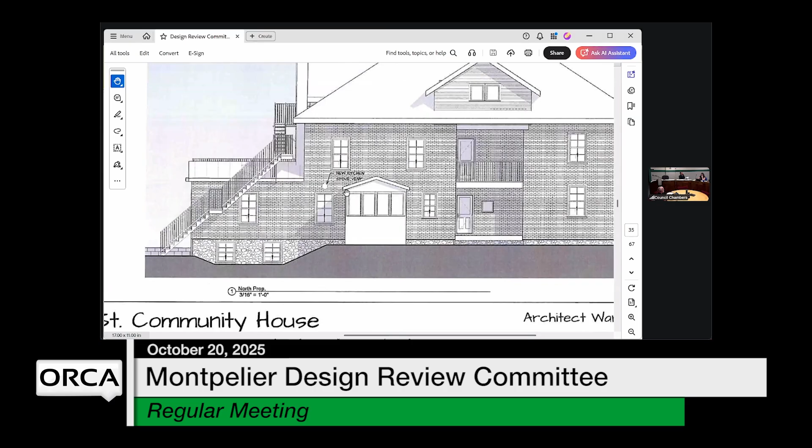So the vents that we've chosen are ones that are intended to be extremely durable to the weather and also...

Oh, was that not on? Thank you, yep. Rebecca, could you hear? And Ben? No, okay. No problem. Next time, feel free to let us know, Rebecca, if you can't hear. I didn't know how to interrupt. Sorry. It's okay, you can always send me a message.

Okay, hi everybody, can you hear me now? Great. So my name's Tom Stearns. I'm working on converting the 100 East State Street property, which is now commercial offices, back to its original use, which was as a residential building.

Today what we're talking about mostly is these exterior things, but briefly, the project seeks to attract single professionals or young couples interested in a more shared living situation, cooking meals together and sharing some facilities. People have their own bathrooms and bedrooms, but the property is well suited for this. It's like dormitories many of us have been in. This congregate living model is proving successful financially, and also because there's a loneliness epidemic out there, so bringing people together who are interested in that is really important. This is an exciting project I'm involved with.

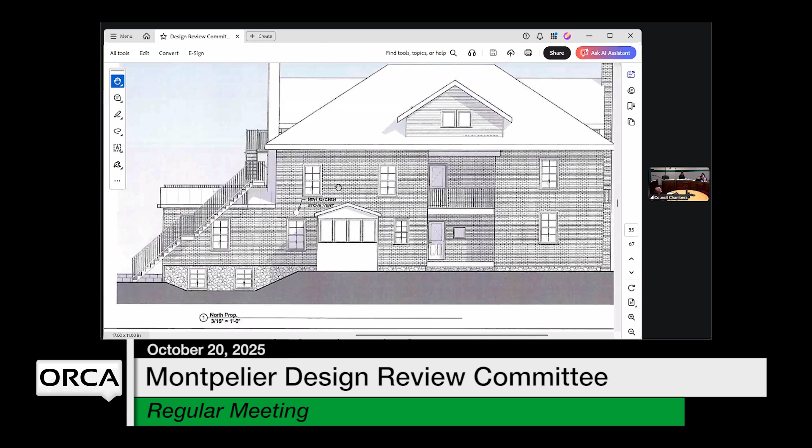What we're seeking to do is have these be as nearly invisible as possible. The desire is for them to be very high quality for the weather, but also something we can paint to help it disappear. You've all seen things painted in an attempt to hide them, and if it's a little off it really stands out even more. We're not trying to do that, but trying to have it blend in. So that's as far as the building goes.

The other changes to the property before this committee have to do with some trees getting removed and some of the parking and pavement getting removed. There are a lot of parking spots there, maybe 2 spots for every resident who will be living there, so that's totally unnecessary. We want to create more permeable surface for rainwater protection, and also more room for gardens.

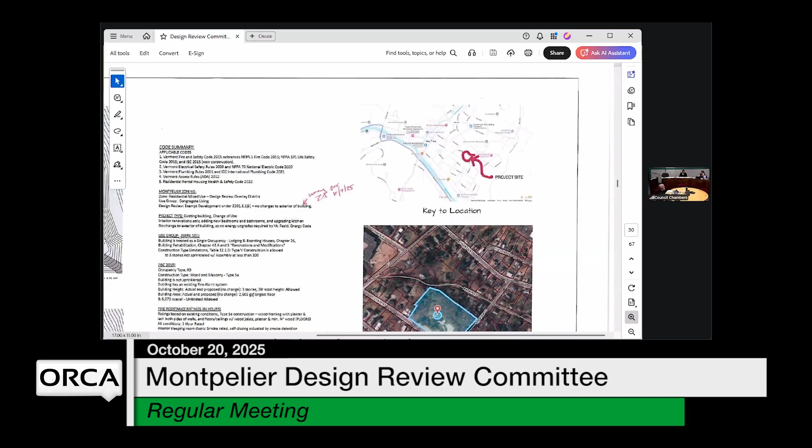Meredith, I don't know if you have the actual... Yep, I can go back. It's on the, give me a second. I don't want to make people busy. As I scroll madly... thank you, I'll go back to this one. Okay. So this is the actual right now.

You can see there's a loop road and a big parking lot there. We're proposing to reduce that by, I think, 56%. So you'll just see the main road coming in up to the building. It will be widened a little bit, which was requested by the fire department and fire chief, and you see the fire truck mocked up in there, which creates a turnaround zone. So there's a little new pavement to clarify these two parking areas, but then that leaves the entire open space full sun, beautiful flat space for gardens, lawn, some fruit trees, things like that.

So the removal of the pavement, we've got the vents, the removal of the pavement, and then a few trees that are getting removed.

And the handicapped access ramp on the front, yeah let's look at that while we're in this drawing. The handicap access ramp is right there next to the front entrance with a little paved zone there to roll in. Currently there's a movable handicap access ramp in the garage up there. It's a little rickety, and it takes two or more people to move it. Anytime you need to move it, that's not really accessible, that's a pain in the butt. So we're proposing to have that right off the front.

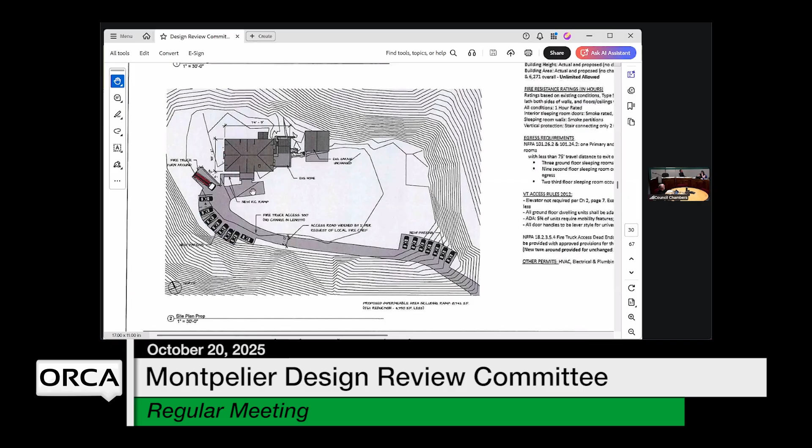Will the ramp be metal? Let me give it a second and stop the share to see if I can find where I think we had the railing details. I don't know if we do. Is the floor surface of the ramp a smooth metal or an open grating? If it's open and grated, that helps with snow and not having to be shoveling it all the time, although depending on the grates and freezing, thawing, nasty snow we sometimes get, it still needs to be managed. So I haven't chosen the specific one yet for the track. They make one that has a narrow opening between the slats.

You can get it in galvanized, which you never have to do anything with. And they make one that has a wider opening, but they make one a little narrower in case somebody's wearing heels, so they don't go through. Or various canes, things like that. I highly recommend those. I put one in for my mom a number of years ago, and it was solid, which meant we had to shovel it all the time, but it also meant there was no risk of anything getting stuck in it.

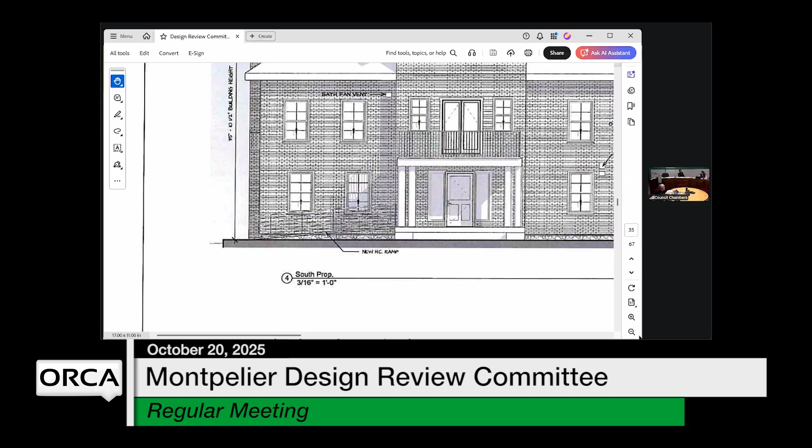And the final piece is some trees and tree removal. Meredith, would you be able to bring that landscape design up? There's 5 trees we're talking about - 5 main trees. A half dead one, an all dead one, a couple of fallen ones, and the main ones that are going to visually change things are these 3 spruces that Meredith is circling right now.

Two of them are pretty big, one of them is medium size. They block some of the view up into the property or out from the property. But the other thing they do is block about 50 to 70% of the winter sun from hitting the building. And that's rough.

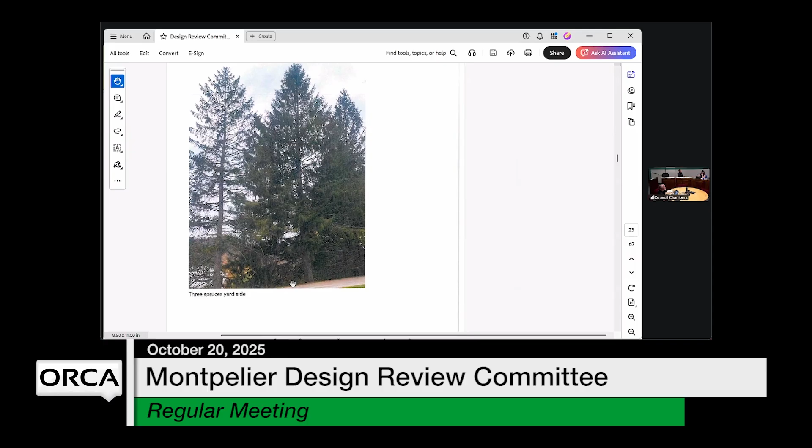And so the plan - I'm just going up to that view of the trees you sent a photo of. So those are the 3 spruces from the roadside, and those are the view of them from the yard side. So what we're proposing is to remove those trees, let the sunlight all the way in, expand the views from the property to the local hills, and plant a hedge there that would eventually get to maybe 8 or 10 feet high along that whole edge.

That would create the same privacy screen that's currently there from these 50-foot tall trees without blocking any sun. For those who know the property, this is a very steep slope down to East State Street. So all the houses along there, it's only when you're on the second floor that you can even see onto this property. That's why just a small 10-foot hedge would completely block that view.

Hold on, I had pulled that up on a Google view. And to be clear, one of the things I love about this property is it's 3.6 acres. It has beautiful forest, and so we plan to tend and care for it well. But trees blocking half of your sun all winter - we already have long and dark enough winters up here.

There's a house, there's that slope. This is a little further down the hill so you can see where those spruces are and where the house is. And so there'll be a hedge called in there. I think that covers the areas.

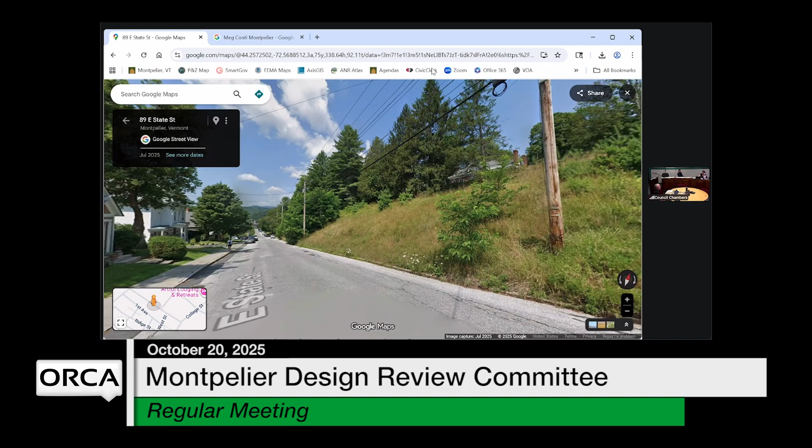If I remember correctly, the outside of this building is brick. Is that correct? Yeah, brick and granite.

When do you intend to put the hedge in? I hope to be able to cut those trees this fall and put the hedge in the spring. We're not talking a series of years - no, that's what I was concerned of. It may be that the entire length, which is maybe like 150 or more feet, gets planted, or we might just do that one section where those trees are first, which is less than 20 feet. So maybe in 2 phases.

Quick question - were there any pictures of whatever railing on the handicap ramp was going to be? I'm sorry, I didn't include any of those, but happy to. I think I had talked to Tom when he was submitting this because he wasn't quite sure, so I figured that was one of the things you guys could maybe provide guidance on if we needed to come back.

If you wanted to see a specific design - I want it to be sturdy, totally durable to the weather, and not be an eyesore. So I can zoom in, there's some little pictures on the handouts you got of closer images of the front of the building where this will go. So I will zoom in on that.

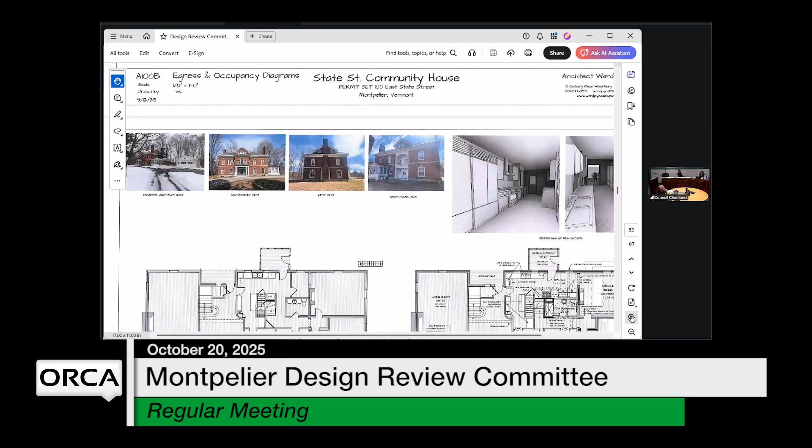Probably a metal structure, a fine thin opening grate - by the way, they work really well. I've been using those for the last 15 years and I haven't had to shovel a step in the entire time. I've shoveled enough snow.

So you can see the building, there's the central entrance. The area we're talking about is immediately to the left, and it would ramp right up to that landing, basically. It's not far, it's only 2 steps up, so it doesn't have to go much.

And since we're going to be adding some pavement around in that area, it'll be a solid surface for it to come into. 2 steps up to about 14 inches ballpark, which is 14 feet, which would maybe go to the edge of the building. I think from our quick guess it wouldn't quite go that far, but it might be nice just to use black iron.

There's this beautiful - it's a good point because I don't know if you can zoom in enough to see it, but right above that entrance is a beautiful original railing. And up there, that is like a black iron. And so I like that idea.

So maybe a horizontal black iron railing. This Mr. Railing makes - Mr. Iron Specialty does a lot of steel rails. That can definitely be a recommendation, that they try to echo the existing black railing. It's been a while since I've been up there, I'd forgotten about that.

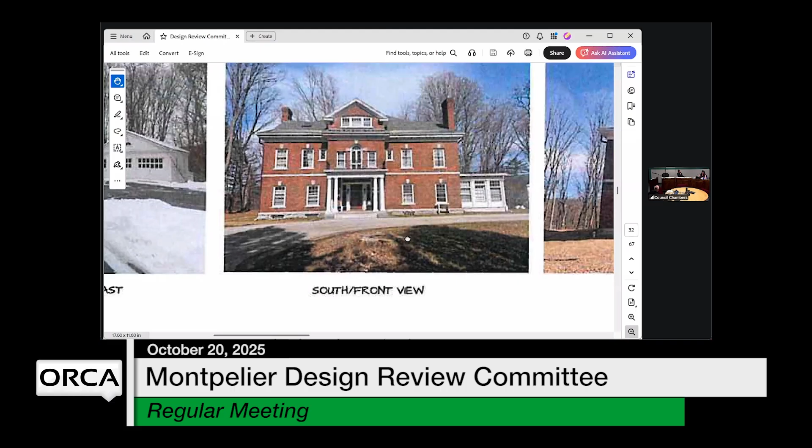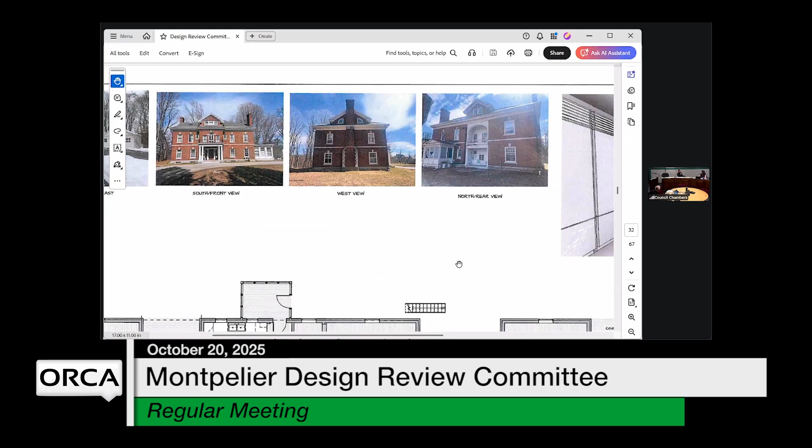I'm certain you've thought way harder about this than I have because I've just looked at it, but the parking seems a little like it seems far to have the cars that far away to park there. And I was also wondering about whether there was an opportunity for covered parking with some solar access.

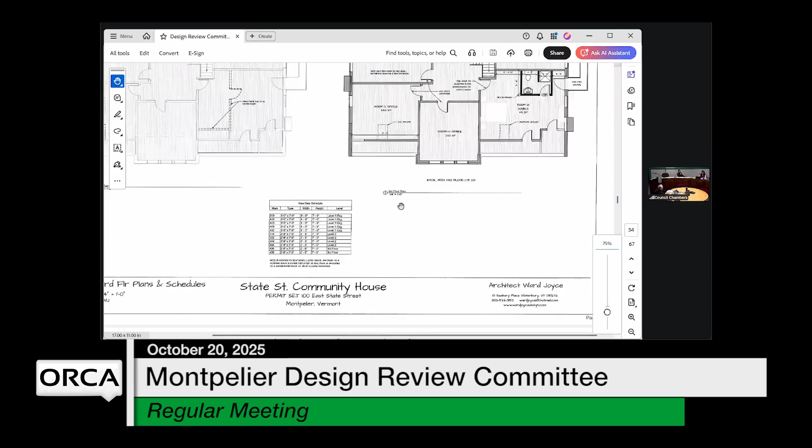Yeah, I've thought about that. I was actually just talking to my electrician who does solar stuff too. So part of the idea is to remove the car dominance of the property. The area right outside the front door of the house - instead of having your car there, it'd be nice to have as much garden right there as possible and not have all of it taken up. So the idea is that you can pull up there right to the house, unload groceries, unload furniture, do whatever you need to do.

And then some people stay parking there, and then there's this other spot that's out of the way a little bit. I want to have as little square footage of this beautiful, well-drained, fertile soil covered in pavement and cars. But I do need to have at least some spots for cars. So that's the thinking in having these 2 spots like that.

But if we were to put another parking area with solar panels, it would be above the handwritten text in there to the north, back against that - yep, that whole area there. That basically would give it full southern exposure. But we would then need to have cars come into the interior of the site.

Should be a bummer - I'd be curious about right there, because with taking that dead maple out, that area is no longer shaded, the lower parking area. Meredith, if you go down a little further - yeah, see it says dying maple removed. That would have blocked - if that area is covered and has solar panels on it, I think that would have pretty good exposure now.

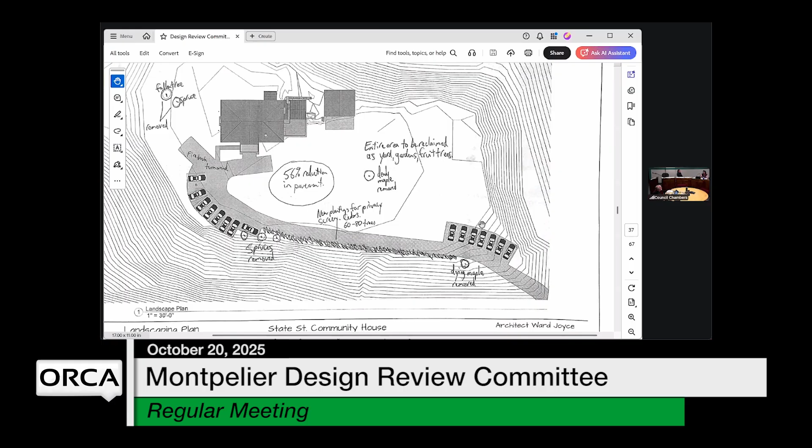I'd like to weigh in on a couple things. One, I really like the idea of the black railing, and I think that's nice versus the metal, which I think will look out of place. But I understand, especially as somebody who does snow removal, why you're thinking about those things. I follow the email thread on this project, and it's really fun to see the pictures. Thank you, that's great.

Looking at the site plan, to encourage the car-free life, since most people are probably headed downtown, would you consider taking one of those spots near where the spruce has been removed and creating stairs or a way to walk downtown, versus walking down the driveway, which takes you away from town and then zigzagging back? I'm just looking at the site plan and thinking that'd be nice. It's not a need or anything on my end.

Well, great, your idea happens to be the original idea of the builders of this building. Yeah, because I remember that, there is a beautiful staircase that goes down there already, exactly where you're talking about. It's beautiful, it's the original thing with the building. There's three different staircases that go down through and dump right down on East State Street. So we will be restoring that, cleaning it up, definitely. I bet you with black railings too.

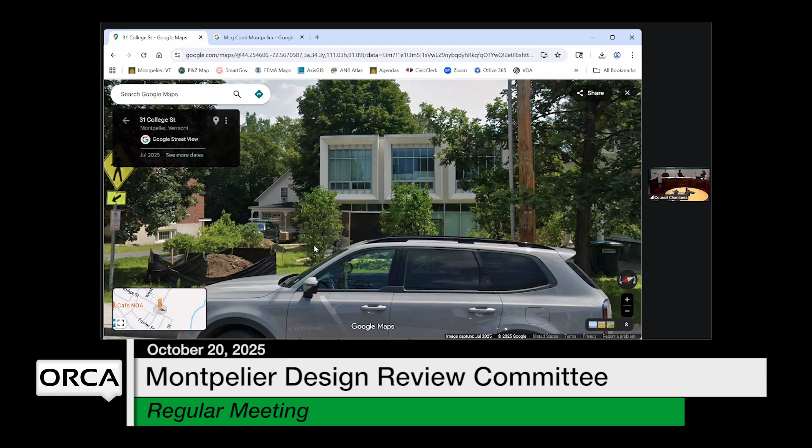I want to go back to the siding of that tower because it is a very visible thing. Even with all that landscaping, you'll see the top half of it. And I don't see it rendered in the west elevation at all. You're just calling it out a little bit on the east elevation as 8-inch vertical hemlock, but it's not drawn at all in the west elevation.

Okay, so the detail, you mean? Yeah, and I feel like it is a major piece. When you say it's not drawn on the west elevation, can we look at that west elevation? I'm not sure if I'm following your train of thought in terms of what is not rendered.

I just have no siding detail on this west elevation at all. To see the contrast between what it's going to look like here and up against the existing building, I think is the point, because there's nothing in color or anything, or the detail as to what this side is going to look like here.

Do you see what I'm saying, Ward? I don't see what you're looking at. Sorry, my bad. I unshared to switch because I had to change screens, apologies. So because this doesn't have the detail. Right, no, that's my mistake.

I'm not sure why that is not shown rendered with the vertical lines, but that is missing in this drawing. I apologize for that. But that would simply be the same vertical lines that you would see. It's an 8-inch, as it's mentioned in the other elevation. It would be the 8-inch hemlock, which would just be the vertical line. So sorry, that's not shown.

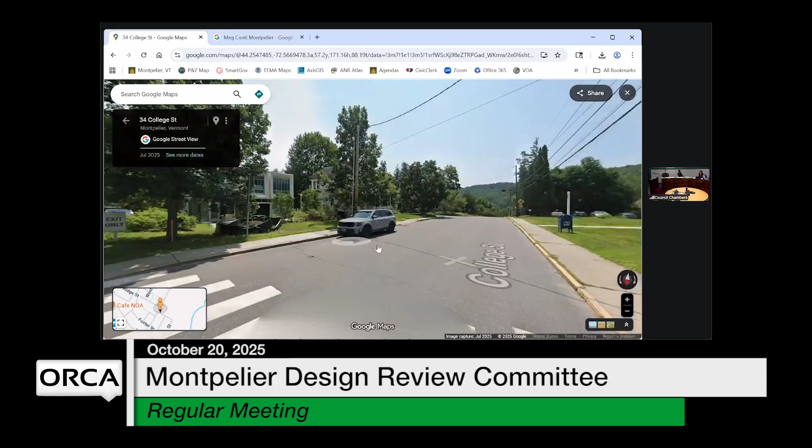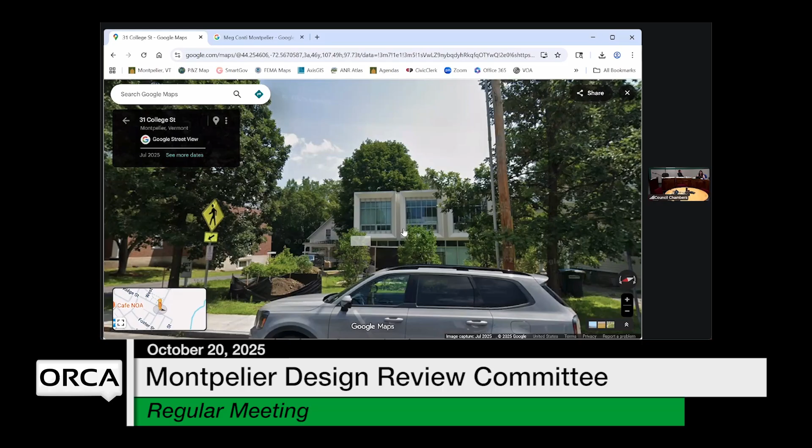Actually, that addition, most of the year obviously, and not in the winter, but most of the year, the backdrop for that would be that large tree there, at least from that angle - trees behind it. But I'm just saying that rather than sticking out against the sky or something, it does have a backdrop of greenery from that tree.

Oh yeah, this is where it'll go. Yeah, on this side, and you've got the gray, a pretty heavy gray/silver metal around all the glass on the front.

What is the use of the house that's to the left of the building we're talking about? This one back here? Yes. That is owned by the physical therapy clinic, VTPT, with other medical offices as well. Yeah, it's physical therapy and some other associated practices in that back building.

Is that privately owned, that building? It's part of the condo association, that parcel that has so many of the buildings on it. That used to be the college.

Do you have any suggestions, comments about that addition, the siding? I guess I wish I had more information. That's all.

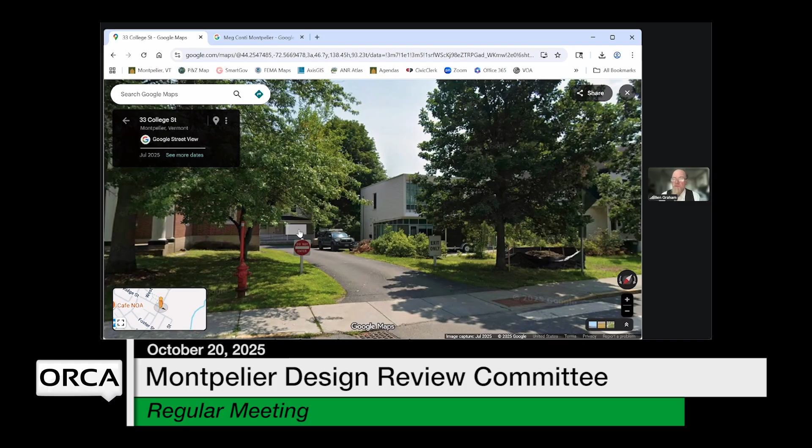What information would be the most useful? And maybe there's a way that I could provide that.

I mean, it's okay, Ben. I mostly just, it's more from a process standpoint of like, if we are approving these designs and getting high quality drawings, I would like them to have more information in them that is reflective of what is actually going to be built that I am approving or not approving for the future, more so than I am particularly interested, because I trust you and I trust this project, that what is being built will be nice. It's more just setting a precedent of receiving drawings that have all the information in them that I am having to make some judgment on.

Yeah, so I hear that on the west side, I don't have that rendered as I do on the north side. But it would be helpful for me if I knew, maybe, because we do have information on what the finish is. We don't actually have a rendering of that, which is something that we could do. I mean, this could be in color, and there could be pictures of examples of what this finish looks like, if that would be helpful.

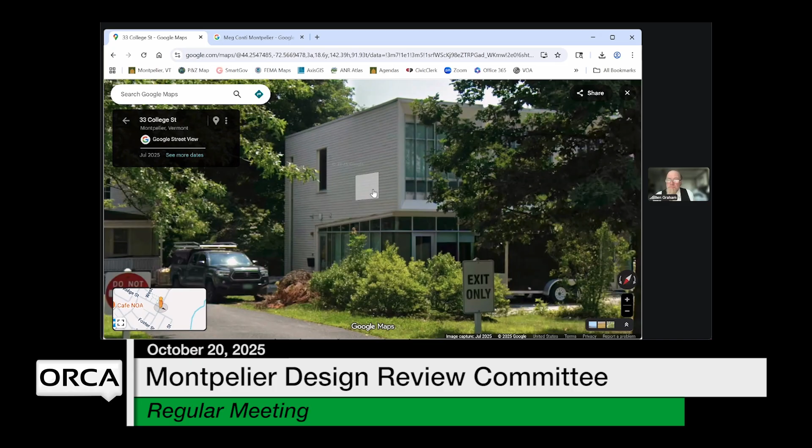By virtue of this being the major piece that you're coming here for, us to have some sort of question about, having more details of what it truly looks like or how it's being put together, a little bit of a section or a little bit more understanding would make me happier. But again, we do have sections, and there are structural drawings if we could go through that, if you would like to see more details than just the exterior.

No, I don't need to see sections of how it's built. I guess I was more referring to the siding and how it connects and the details around what this truly looks like, a little bit more about how that awning is attached. What is that kind of brace that's holding that up there? Is that a steel thing? Is it all wood? I just don't know what it is. I don't know what I'm approving, I guess.

Yep, so we do have this information in the drawings. Let me just, partly you'll have to excuse me, I'm not in my office. I'm in Ohio right now at a funeral, so I'm not the most together. I'm looking on my phone for things.

Okay, so on the north elevation, there are annotations that show the support rods for the canopy, and there are two of them shown in that elevation, along with the dimensions of how high they are and where they connect to the building. And then if we go to the structural drawings, there are more details about the thickness.

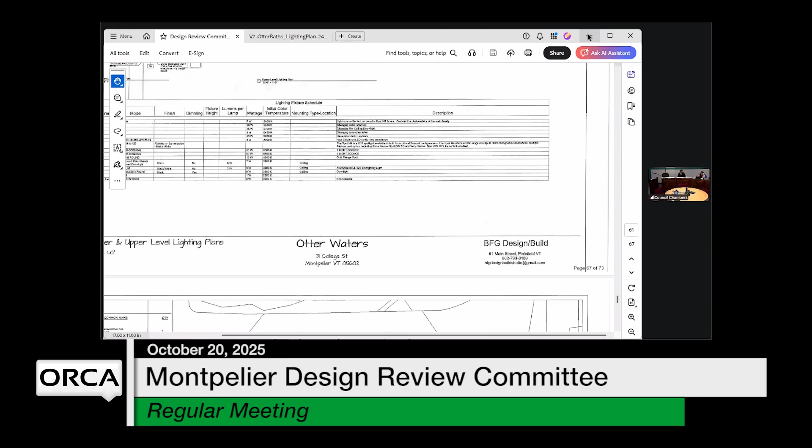If we go to drawing A500, detail sections - I'm gonna be honest, if that's in something that doesn't show the outside, I may not have given that to the design review committee, the A500. So you're gonna have to give me a minute. Just because that was one of those, like, they're concerned with the exterior, and it was such a huge packet that, give me a minute, I'm gonna go back out because I went to share the exterior.

A500. So that vertical hemlock will be the entire height of that, a little less than 7 feet width of that entry. On the backside, it shows the vertical hemlock with a trellis down below the cedar fascia.

Yes, so the trellis - if you look at the north elevation, you have the main entry in the center, and then to the left is the egress entry. There are a couple of steps down into that stairwell. And then that trellis would be on the east side of that egress passageway. That is mostly for the entry of most of the people coming into the building, for them to have that entryway screened slightly, and there may be some vines that grow up or whatnot, but that's mostly a visual screening for people coming into the building, so that whole entry area isn't such a strong visual aspect when you're entering.

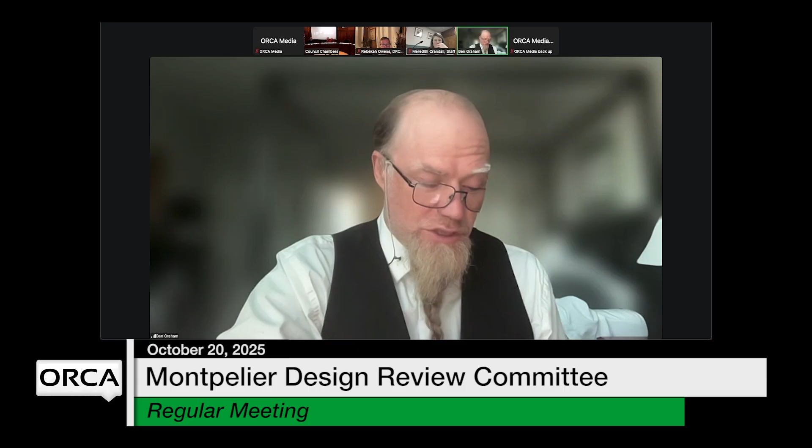As shown, proposed 1-inch vertical butternut slats finished with the Valhalla Lifetime preservative. That actually wraps around to the east side behind the trellis - that same finish goes behind the trellis. And then above that on the east side is the vertical, 8-inch wide vertical slats as well.

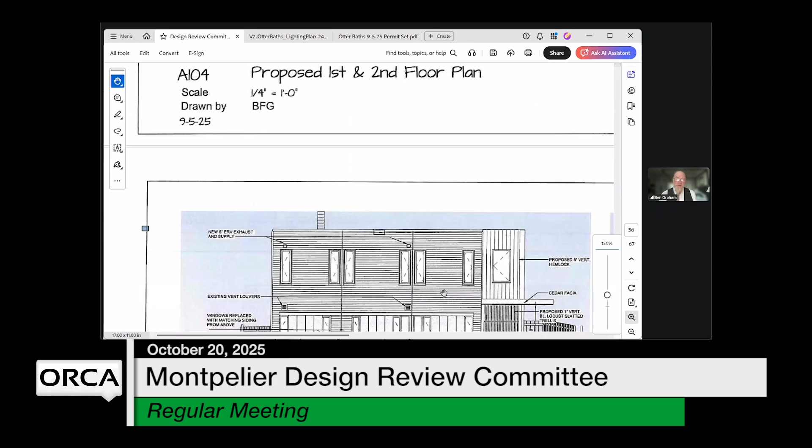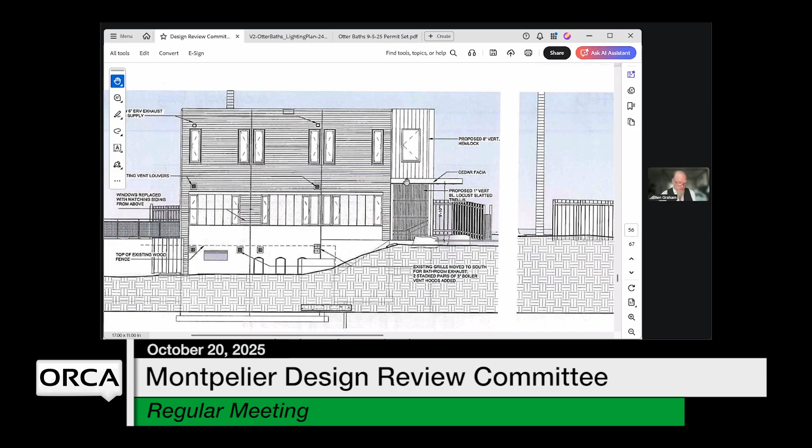The canopy is a fairly thin construction. There would be the wood fascia that's shown, cedar fascia finished with the same Valhalla lifetime preservative. Then you have the 2 support rods for the canopy structure holding it up. Those are 5/8 inch, and that would be a black metal.

The attachments for that would be hidden behind the siding, so you'll just see that rod as it's shown kind of disappearing very minimally into the siding.

Nice. The one thing that's not shown is the underside of the canopy, which would be the same vertical, thin vertical butternut wood that is on the facade would continue overhead. And there are a few lights shown in the lighting plan, just directly down lights.

As well as emergency lighting fixtures there as well. Those are 1-inch wide vertical slats, so it's a lot of little narrow slats that would then wrap the underside. Yeah, it gives a little bit of aesthetic interest for the entryway. Yeah, no, I think that's nice.

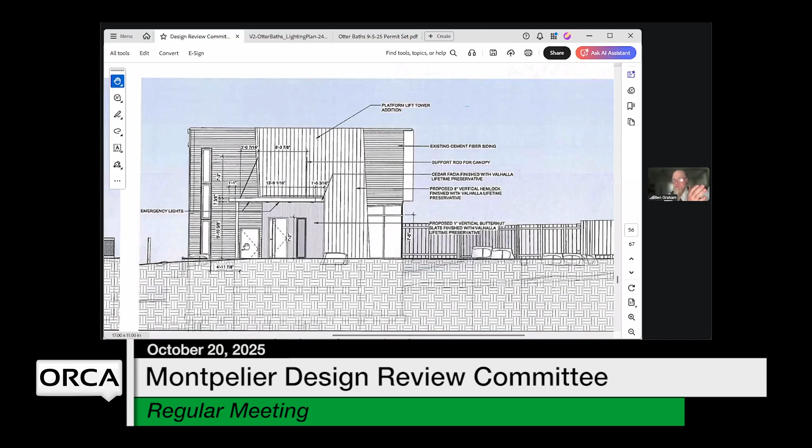And that's partly the reason the trellis as a screen helps to further make that entry kind of not as noticeable. Yeah, not entry, but egress.

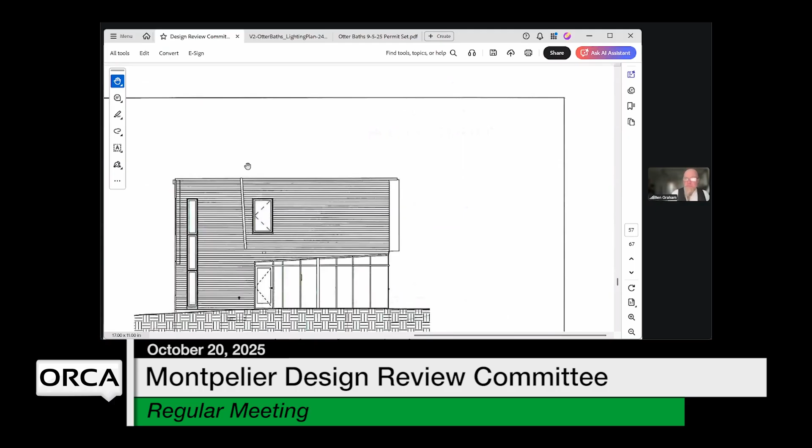So I'm on a borrowed computer and my power is running out. So I'm going to quickly get the person who owns it to help me. One second.

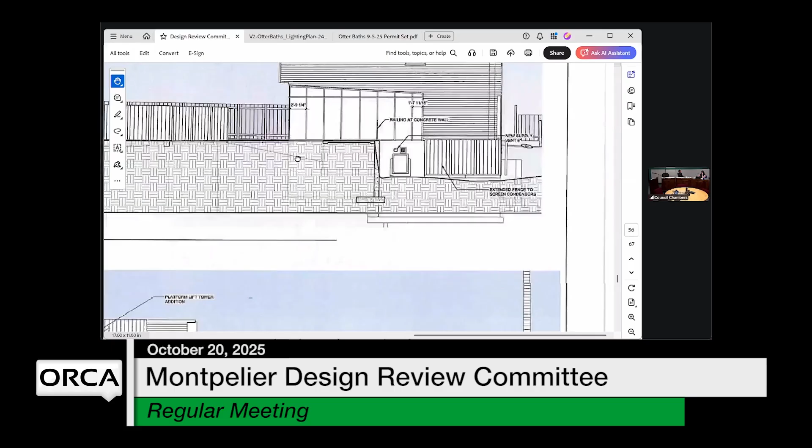Here we go. There's the trellis. Sorry, I was in the wrong other. Any questions, suggestions? No? Okay, I'm happy for the project.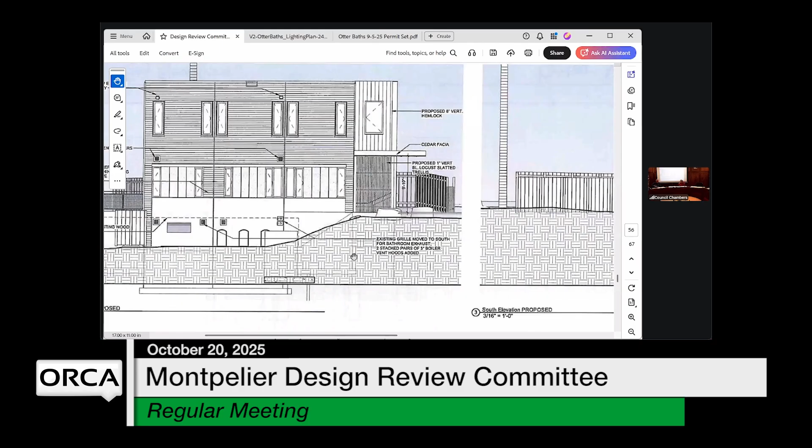You know, that addition is less than 7 feet wide. So it'll be pretty narrow. I mean, and 8-inch widths, there's not even much hemlock there. I mean, it's that wide.

Again, I can read through the criteria for the project. Number one, exterior design and materials of new construction or alterations of existing buildings shall be consistent and compatible with the characteristics of the existing building or other properties in the district. Additions and alterations to non-historic and non-contributing structures shall respect and be compatible with existing patterns and setbacks found in adjacent buildings. New additions on non-historic and non-contributing structures that overshadow or diminish the historic character of adjacent contributing structures are prohibited, and this application is acceptable.

Existing buildings shall be recognized as a physical record of their time, place, and use. Acceptable. Proposed landscaping shall be compatible with the neighborhood and the site on which the project is located. Acceptable. Location and appearance of all utilities, mechanical equipment, trash storage, and fencing shall be sited to minimize adverse visual impact or adequately and appropriately screened from public view. Acceptable. Additions and alterations to buildings called for by public safety, accessibility, and fire codes shall be designed to maintain the character of the construction materials and features to the maximum extent feasible. Acceptable.

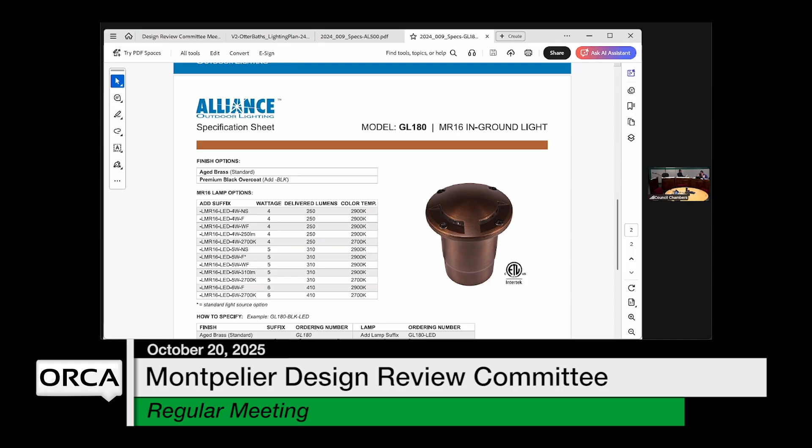I'm guessing that's a nice complement to the beach nut, like the wood tones that'll be there. Well, those will mostly be in the landscape. Yeah, and really the whole design of those is to not be noticeable at all. The goal of the landscape lighting is to not be noticeable.

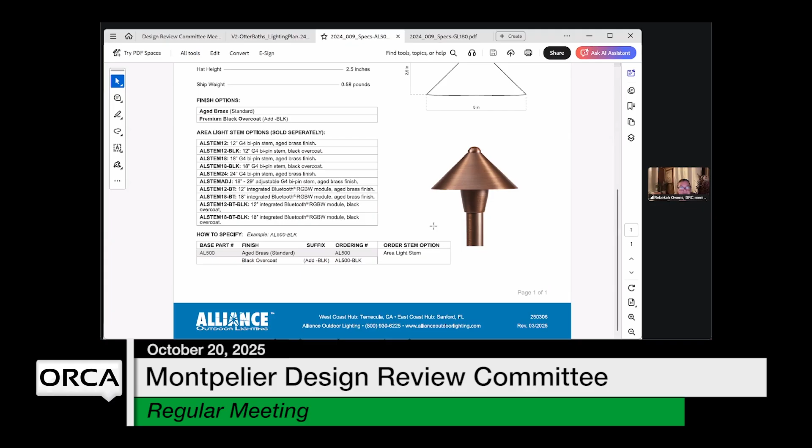These are actually pretty small, and they're going to be tucked in among the different plants. So at nighttime you're going to see the actual light, and not the lamp. During the daytime you're going to see the plants, and these small copper lights will kind of disappear in and amongst them. So there's a bunch of them, but they're very small and they don't throw a lot of light.

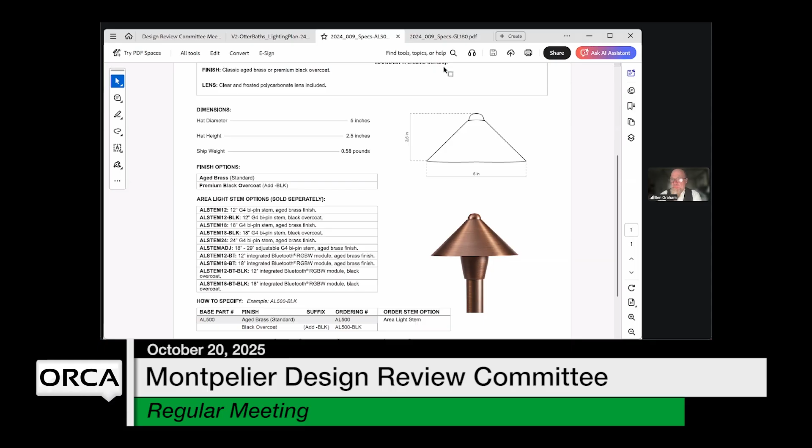So the landscape designer set them up based on the specifications recommended by the manufacturer to give a certain amount of light, which is pretty low. No, what I mean is I like the warm tone versus cold, like black or silver or something like that. I like that choice, that's what I'm trying to say, is I like it.

That's funny, Casey, who is also a part of this, and Twila both preferred that. Originally the landscapers suggested a black fixture, and that was changed to this.

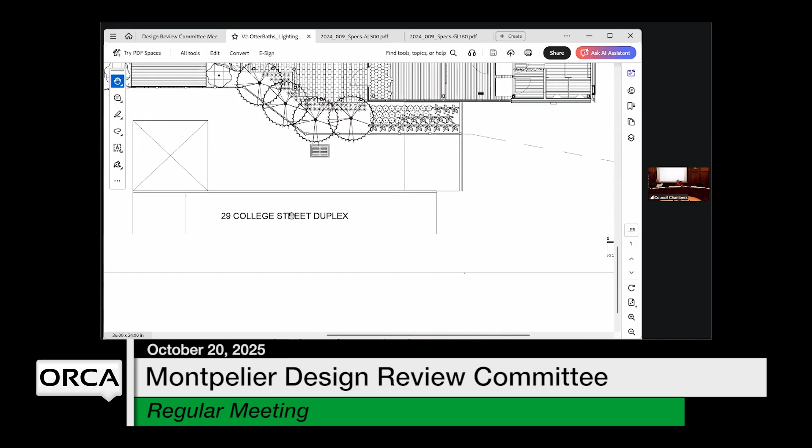So there's one here under this tree, I can't remember if that's the cone one or the other one. There's one area here they call a 'hat,' which is a down light. And then the in-ground lights are basically a side wash, I think those don't shine upwards because of the cover over them—the light basically comes out of the side of those in-ground lights.

So it looks like you're doing the side ones along the edges of the patio, is that right? Yeah, those are basically walkway path lighting, versus the cones or the circle with the dot in it, which are more for lighting the landscape plants and such.

And they're super low lumens, really low. So I'll need to double check the lumen totals. Some of these might get reduced a little bit, but these are going to be really, really low lumen totals.

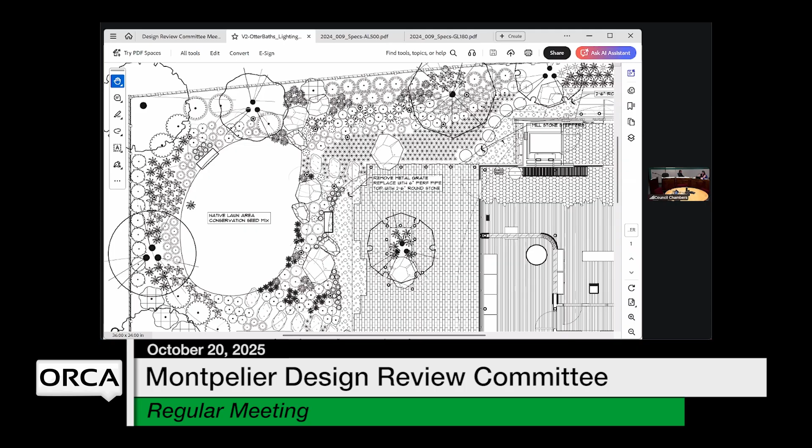I mean, they're like 4 and 5 watts, pretty minimal. So pending the outcome of the design review committee's vote tonight, I'll still need to go back through and double check the lumen total, and I'll give you that as part of the final write-up. But I wanted to get their input first before I went through the math.

Does anybody have any other questions about the lighting? So regarding that criteria, item 15, outdoor lighting fixtures, that was acceptable.

And then number 16, landscaping, screening, and site furnishings. Projects within the design review district subject to the landscaping requirements shall consider site furnishings, including fencing, seating, and other types of site furniture visible from the street or side yards. Does the landscaping obscure or undermine key architectural patterns or elements on historic buildings? And mechanical equipment screening—again, that's acceptable.

Wait a second, I don't think they're applying for that, are they? Not the fence, but this is about the landscaping too. Yeah, the fence will have to come back—that's going to be a taller fence, so that will have to go to the DRB. We're going to do that in a whole separate permit, keep it distinct from all of these other items.

So again, based on those, do I hear all in favor? Speak your names.

I'm going to abstain out of being friends with the whole situation that's happening here. Actually, I'm going to abstain because I don't really understand exactly what they're proposing on the lighting.

For the lighting? Oh, okay. So then it would end up being a no. We have to have three votes. Okay, then I'll say no because I don't understand exactly what they're proposing on the lighting. What is your question about the lighting?